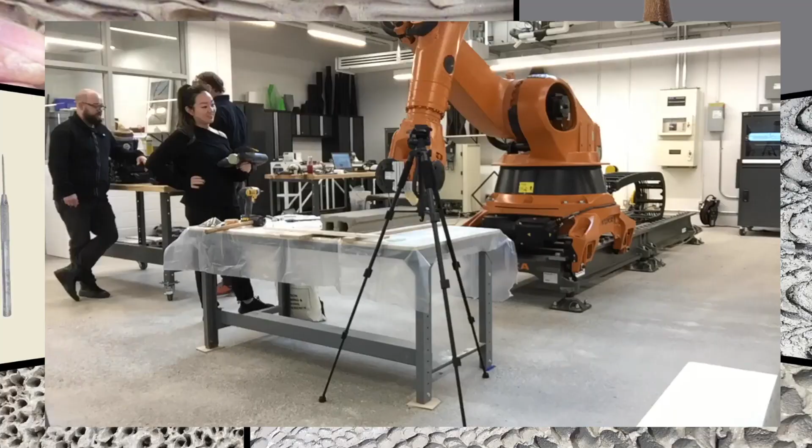Recording manual manipulations of clay allowed us to observe the behavior of the terracotta clay body and record impressions made by human touch. Because of the density of the clay and the need for speed in the factory setting, we realized that the robot was a critical partner when scaling up haptic processes to industrial fabrication.

Our next step was to transition towards recreating these haptic tactile experiences through the robotic arm.

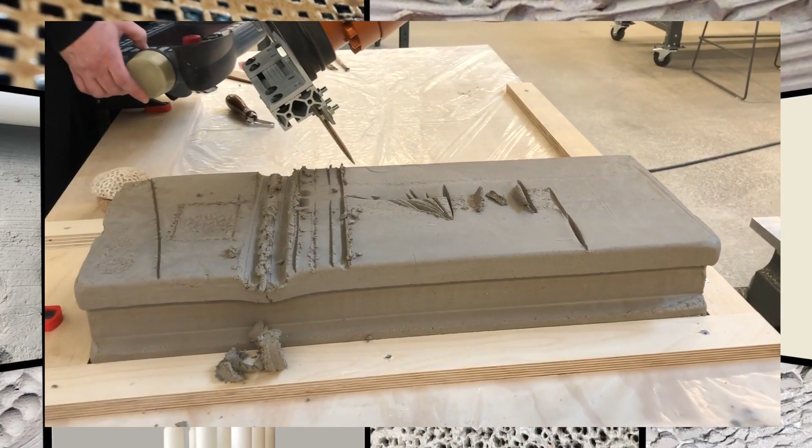Here we can see our very first experiments with the robotic tooling on Boston Valley Terra Cotta's standard terracotta extrusions. We simply attached a ceramic hand tool to the end of the robotic arm to mimic hand marks.

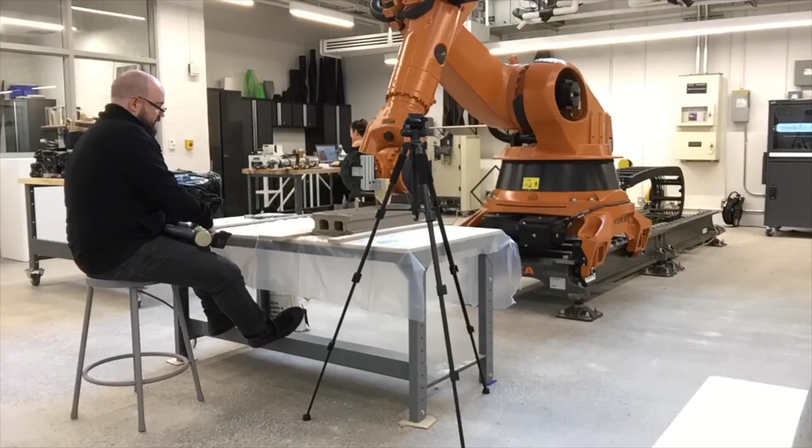It became immediately clear that direct translation between the hand and the robot would need skill development in terms of operation, material behavior, and produced effects. At this stage, the robot was operated using manual controls to better understand the forces the robot exerted on the clay. The clay used in Boston Valley Terra Cotta's manufactured products is extremely dense, so the robot provides strength to manipulate it, up to 150 kilograms of force.

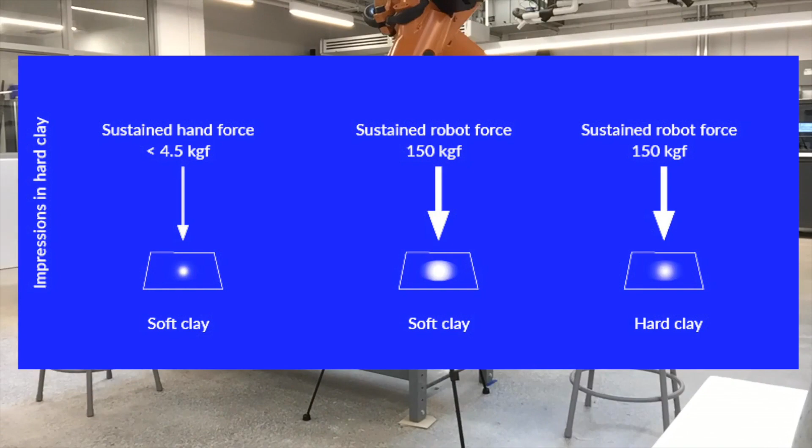However, because of its strength, it essentially treats the clay as a non-material. It carves through it without sensing how the clay is behaving, or even sensing that it is there at all. And so we needed to develop a process to program craft and materiality into the tooling that teaches the robot to account for the behavior of the clay.

We saw great potential in making use of the robotic arm in an industrial post-extrusion process, which would develop a new kind of digitally tooled haptic experience. We found that layering impressions in the clay created a richer surface and chance material behavior.

This is one of our first custom-made end effectors. The repetition and slight variation in terms of the tooling and the way we overlapped clay marks to create variations in material behavior, we're starting to come close to developing craft skill in the robot to mimic our initial hand manipulations.

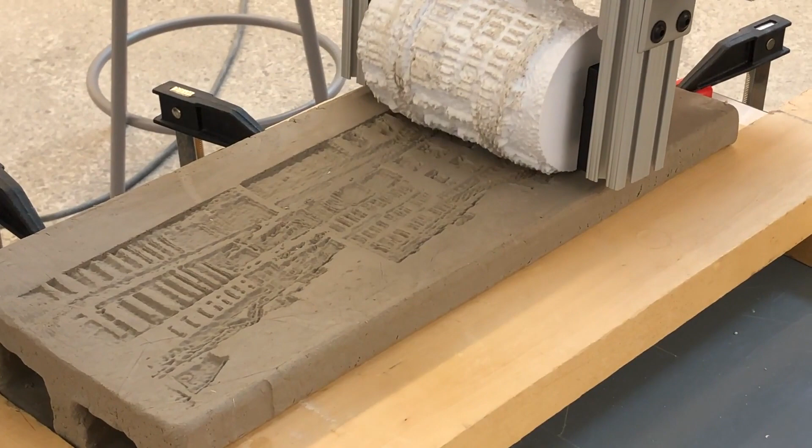We then simultaneously approached the project from another perspective, the optical distance. For this aspect, we worked with an image that could operate at an architectural or urban scale. Using an image from the archives of the Erie Canal Museum of Syracuse, we tested various ways the image could be made through impressions in the clay surface.

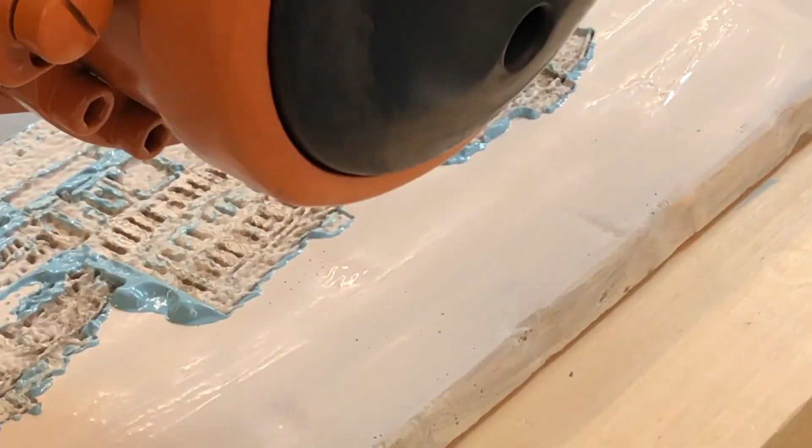Working with wet, unfired terracotta extrusions from the factory, we explored the use of common hand stamping tools, like these embossed 3D printed rollers. Multiple rollers were printed using variations of height field images wrapped on the roller surface.

An array of 3D printed end effectors were designed and fabricated at various scales, lengths, widths, and depths in order to test the legibility and textural qualities of the impressions.

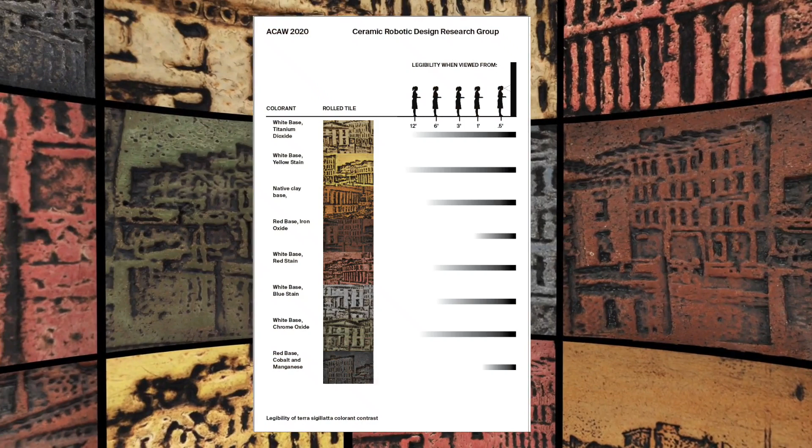One such exploration was the role of color in image legibility and haptic qualities. Applying terra sigillata allowed us to create layers of color, providing contrast and therefore legibility at various distances.

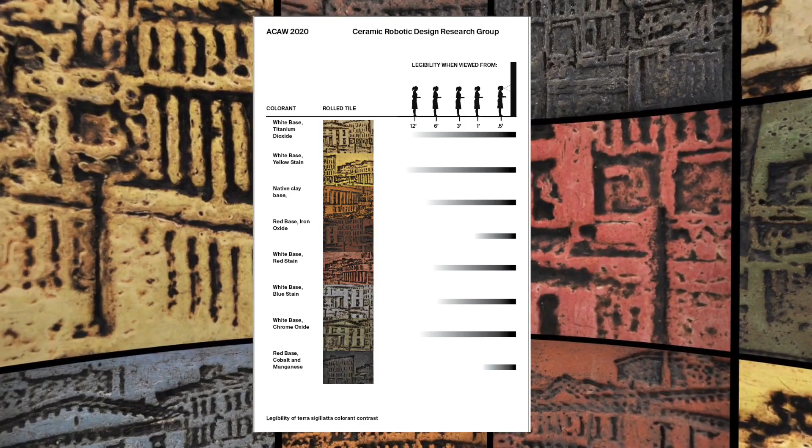We were also interested in the indexical relationship between clay, color, and the physicality of sites of extraction. We explored using clay from the banks that feed the Erie Canal to produce the sigillata, so the colors would reveal the materiality of the site itself in both a symbolic and embodied way.

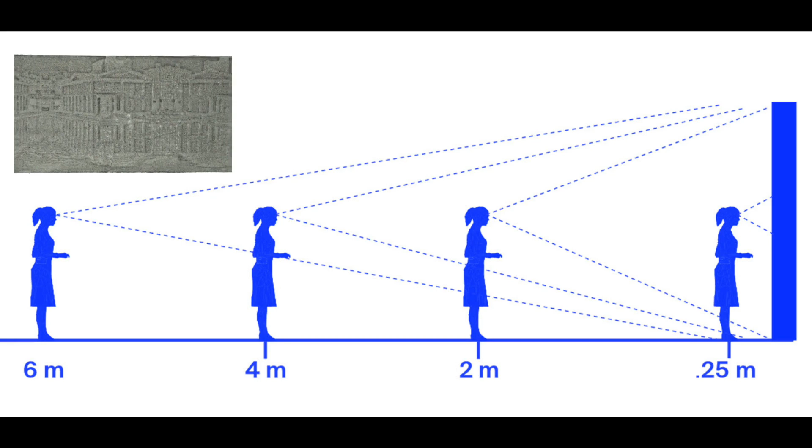We then explored a variety of 3D printed rollers, differing in scale and geometry. Throughout the experimentation, we sought to create and test legibility of the image at varying distances. We found a depth limitation in this process.

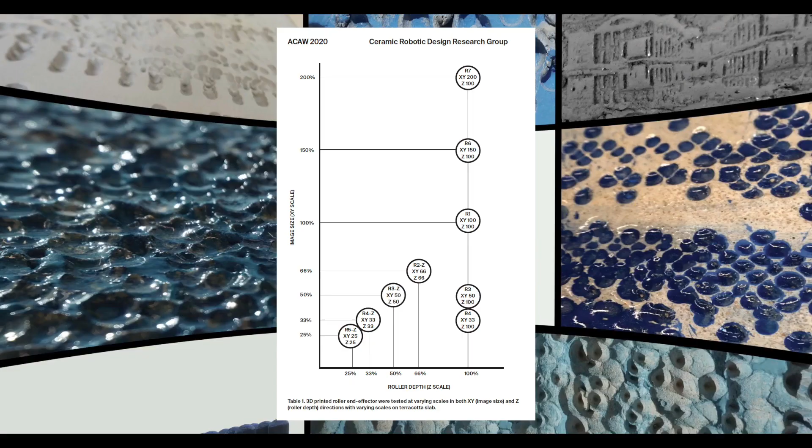To be legible from afar, the roller needs to be scaled proportionally in depth. This is not always possible within the thin surface of the extrusion panel, as we can see in this chart.

We also explored different types of roller geometries, including those that would roll in a non-linear manner to produce surface tessellation patterns simply through rolling. This included an oloid roller, tricylinder rollers, and wobbly rollers, which are cylindrical rollers clipped at various angles to roll along a wave-like line. Ultimately, we found we were limited by the roller.

As the image gets larger, it was difficult to embed the density of details required to produce tactile qualities at a haptic distance. What became evident is that the embossed roller method images seemed to only work well when scaled at a single terracotta panel.

When we tried to scale up the roller to produce an image across multiple panels, not only was this highly uneconomical in terms of roller material required, but also insufficient in terms of the legibility from afar and the haptic qualities from up close.

Here we encountered a common problem of digital fabrication and design. Digital images can be infinitely detailed, but those nuances don't translate to clay in the same way.

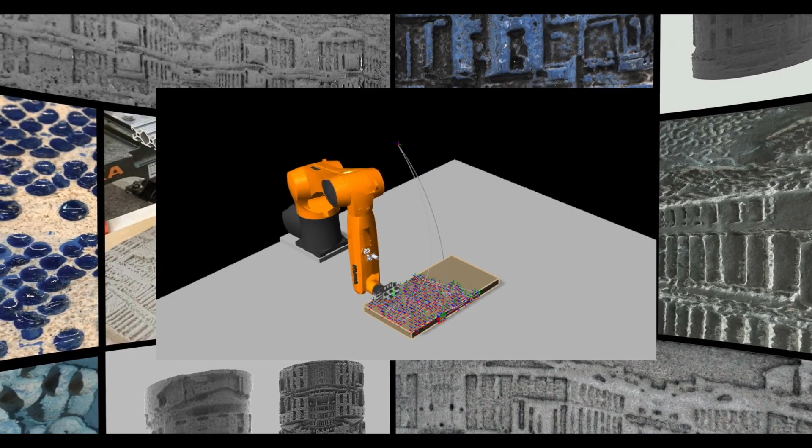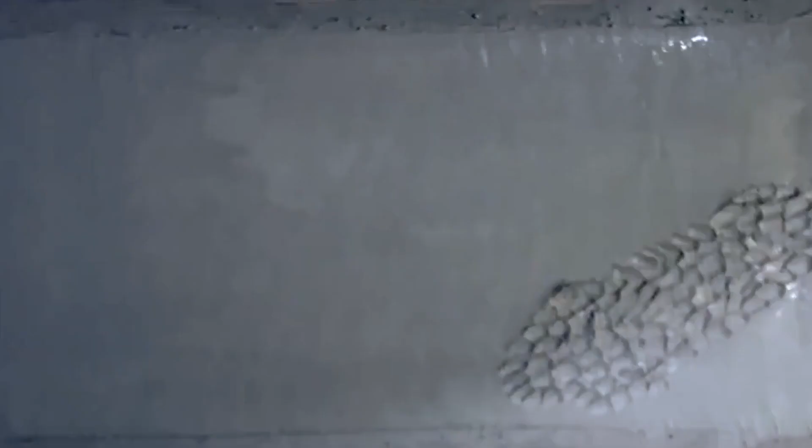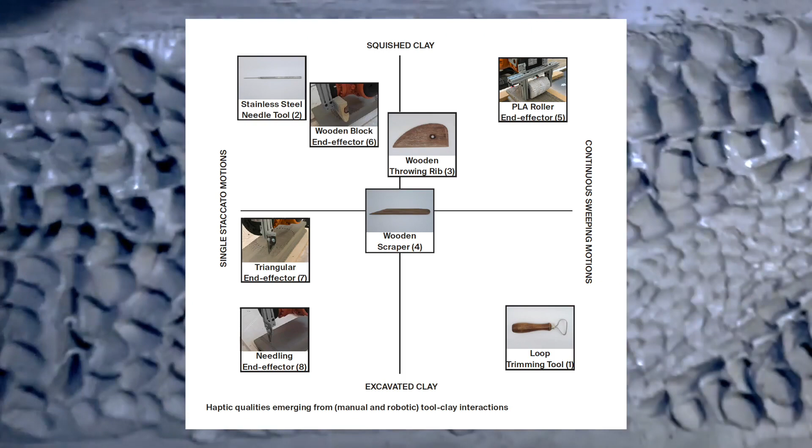Clay doesn't always want to be digitally precise, and digital 3D modeling is unable to precisely simulate the behavior of clay. Instead, all materials are treated as quasi-non-materials, with no character and no behavior. Yet clay deforms—its moisture shapes how it forms ridges and builds up, how it sticks to the tool or peels off. This unpredictability was precisely our interest in the digital process.

So we returned to some of our early tooling methods, learning from the pressure required to affect the surface topography. We fabricated a series of tools as extensions of the robotic arm. We found the more compelling textures to be those that suggested pointillist paintings and bas-relief sculptures, textures that are familiar and haptic. This type of craft sensibility allows us to move beyond the novelty of robotic technology towards an artistic end, one of our team's primary goals.

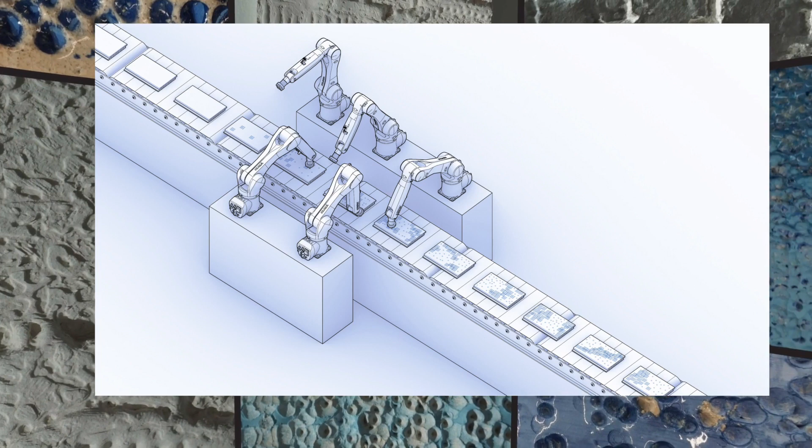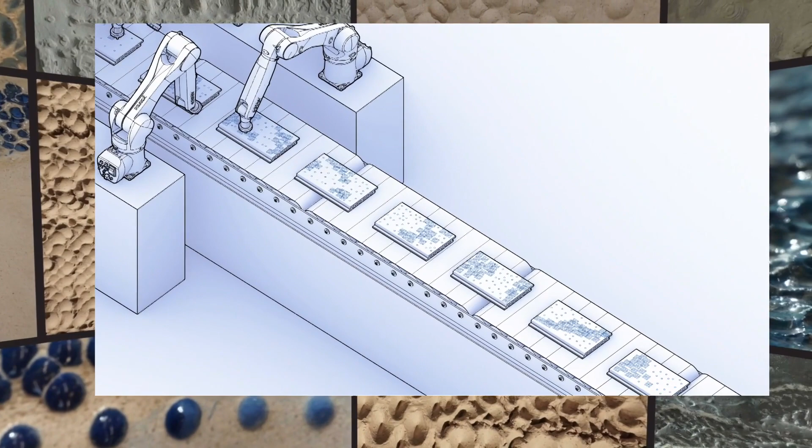At the same time, we saw the potential for this method to produce a type of digital manufacturing economy. Any image or textual pattern could be programmed at the same cost using the same tools. With the robotic arm, the economy of production is no longer that of matrices—no longer finding economy by making numerous identical copies from molds or stamps. Instead, the logic of automation uses economy of movement, where each movement per second costs the same as any other movement. With the capability of moving at a pace of 2.3 meters per second, programming custom images for robotic stippling had scalability potential.

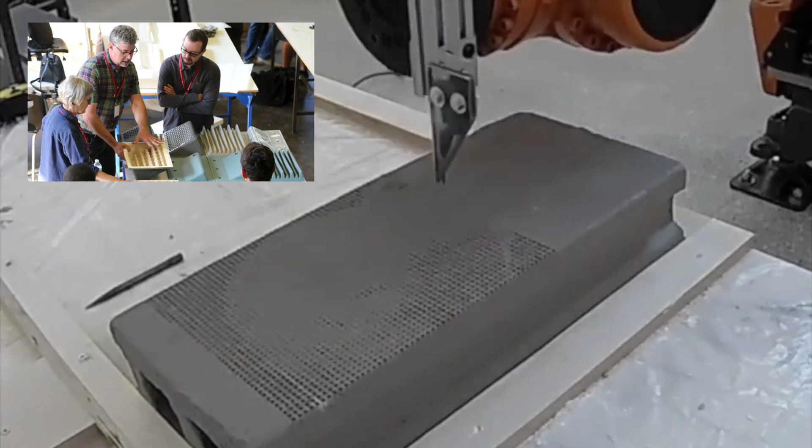In our early attempts at using this method to create an image, the results fell flat, literally. Seen here is a panel tooling of someone you might all know, at ACADIA 2017. This early test didn't leave room for a feedback loop between the digital design process and the corresponding material behavior. Here, the terracotta panel was still being treated like a non-material.

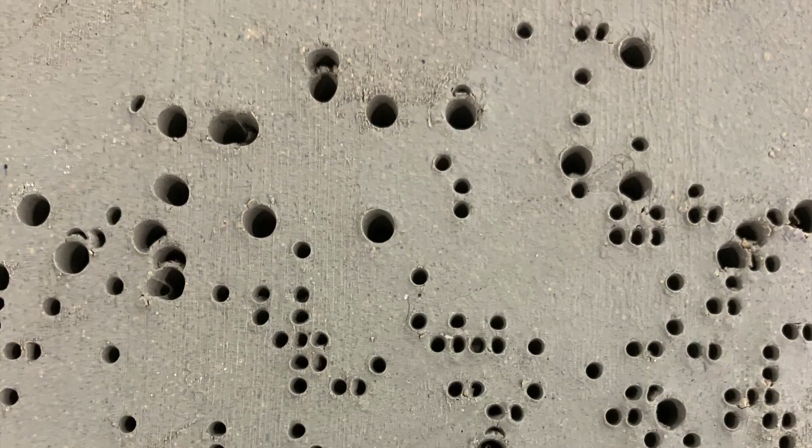Tooling was based on images produced in a grasshopper script, which assigned various diameters of circles based on light and shadow. This was directly applied as a tool depth to the clay surface using a tapered pick to make impressions. The resulting panel was not compelling materially, nor were the images even legible.

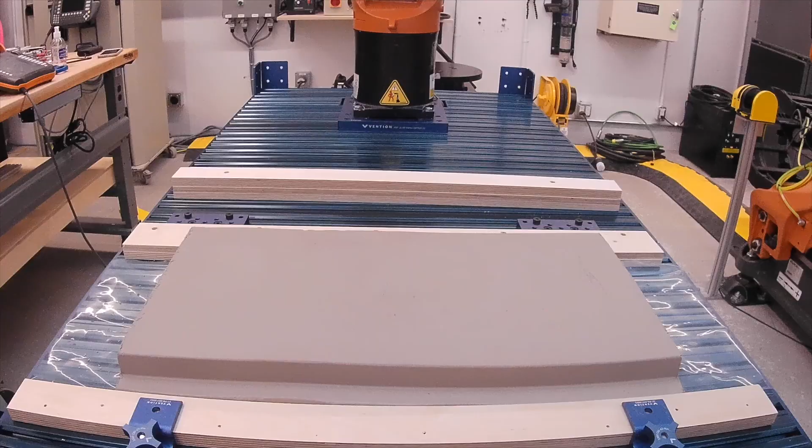So we realized that we needed to stop trying to predict or control the outcome of the digitally tooled clay. Instead, like we did by hand, we started by simply making marks, this time through various randomized, computationally scripted points. Just as an artist might repeatedly make the same action to see what might shake out, we also treated the digital process in the same way, developing a feedback loop between the haptic qualities produced rather than trying to make the clay conform to a premeditated image.

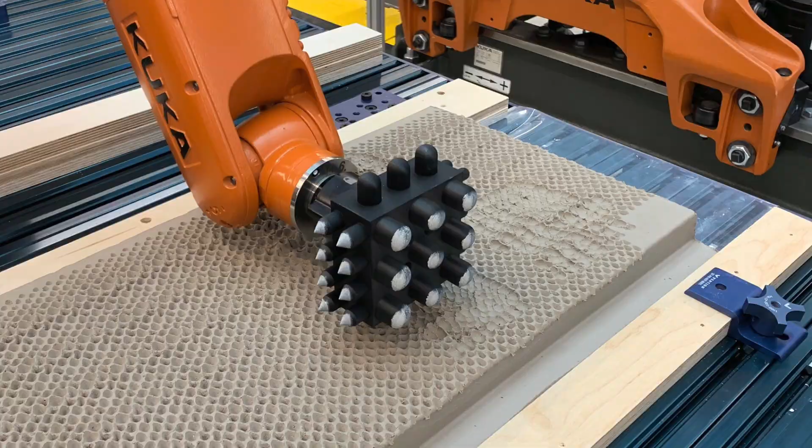We started from a series of densely packed gridded points and moved towards random seed-generated points, varying density, spacing, depths, and radii of marks. We also developed a 5-sided tool making use of the 6 axes of movement of the robotic arm for continuous tooling of varying marks. In this way, with our robot collaborator, we began building skills over time with training, in the form of altering programming and tools, to exploit the central qualities of the resulting material effects and produce a feedback loop.

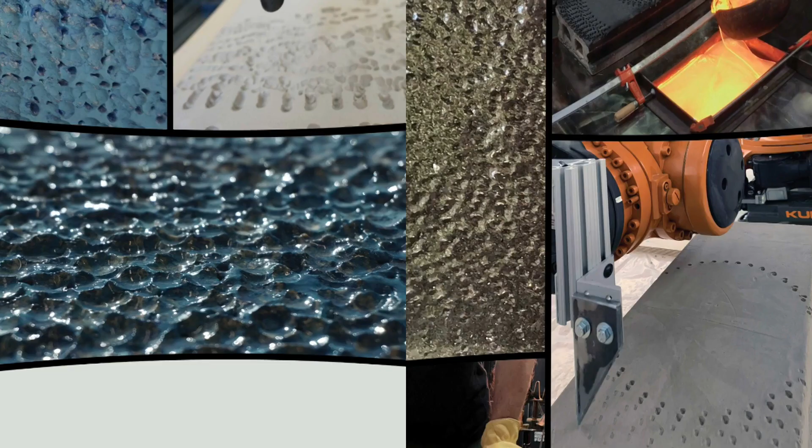Dense and overlapping marks, the scale of fingerprints, on slip-colored clay created literal and phenomenological depth to the surface. We evaluated these surfaces based on surface qualities and textures, matte and gloss finishes, their potential to catch light, and how they might reflect their surrounding environment.

In this regard, we were also interested in how these digital haptic terracotta surfaces might interact with other reflective materials, namely glass. Reconsidering the tooled terracotta extrusion as a mold, a series of experiments were conducted at the Corning Museum of Glass to explore how our digitally tooled surfaces might inform the behavior of molten glass.

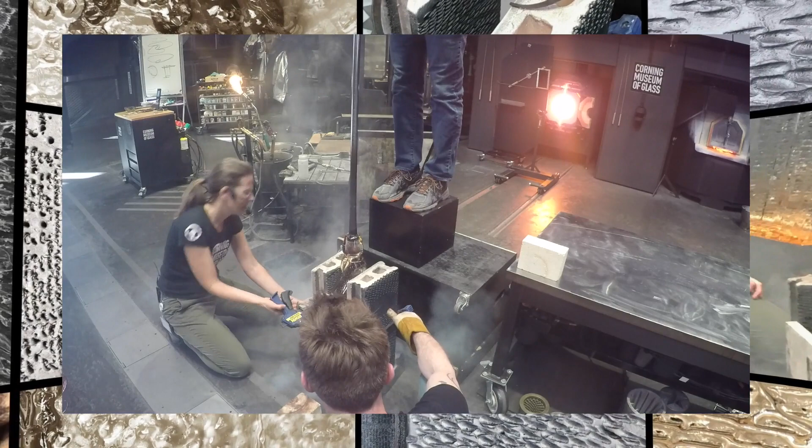First, a cavity mold was created for a blown glass vessel. The tooled faces were set up to form a cavity and clamped tight, and pre-coated with graphite release agent. A calibration tool was used to pre-size and pre-shape a molten glass bubble, which was then lowered into the cavity and blown using a blowpipe. The vessel was rolled, centered, and shaped using the flame, and the blowhole was cut off in cold working. Experiments were made with clear and colored glass to test optical effects of the pattern.

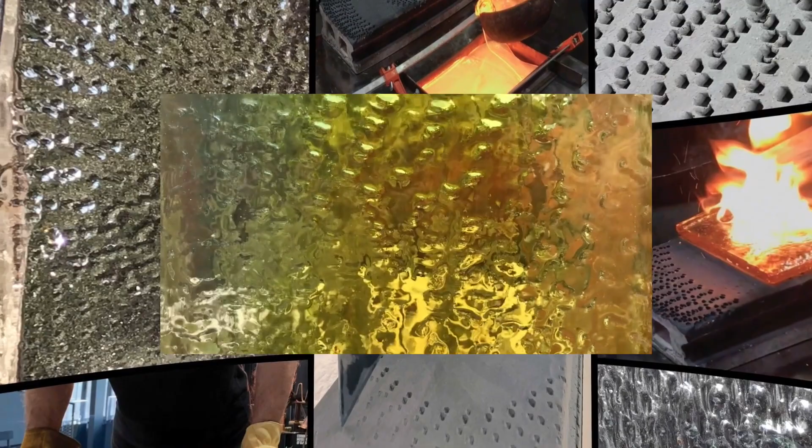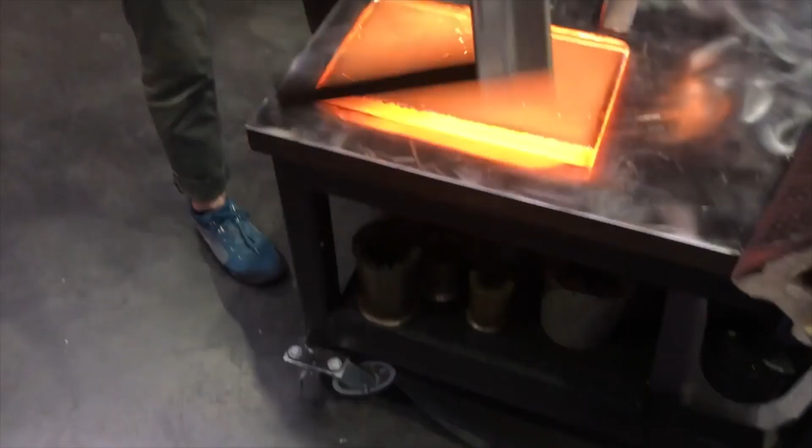Second, a press mold for cast glass was explored. A thick glass slab was cast into a steel frame. The tooled terracotta surface was pressed onto the glass slab for several seconds, then released, generating a transferred pattern.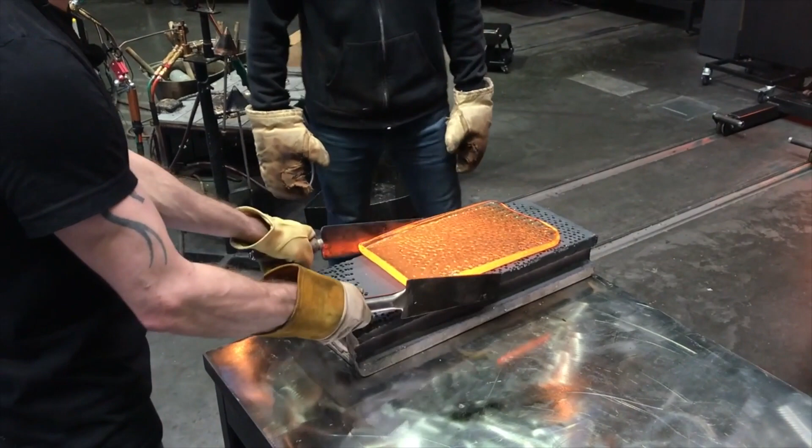Finally, a surface mold for set and press glass was tested. This thick glass slab was flipped onto the mold, allowed to set for a couple of seconds, and then pressed into the clay to pick up the tooling. As with our terracotta experiments, we hope to develop a feedback loop between the digital tooling of the terracotta panels, here used as molds, and the material behavior of glass.

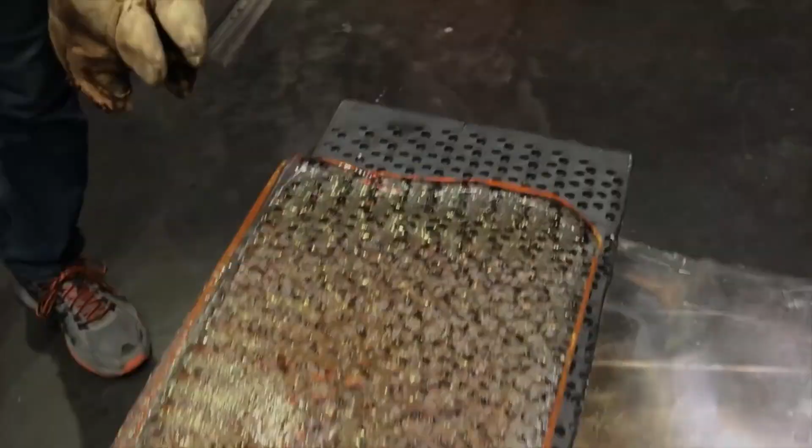Our next step was to apply these sensibilities about digital materiality to a large-scale image, with the goal of producing a surface that operates at both optical and haptic scales. Sampling the qualities of the most successful haptic surface tests, we assigned them to different regions within the image.

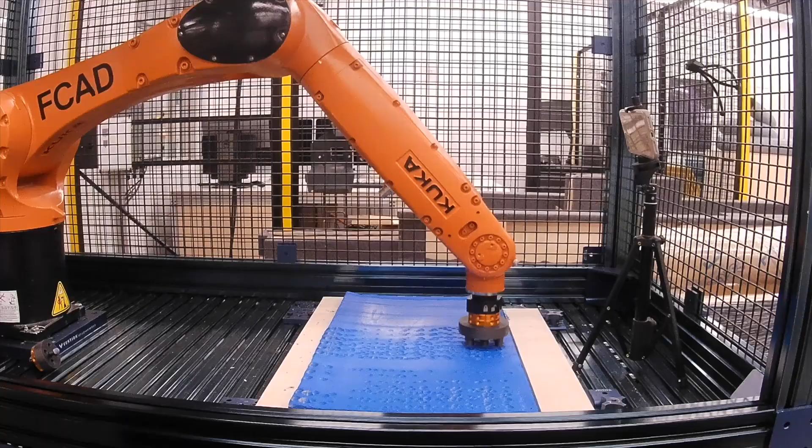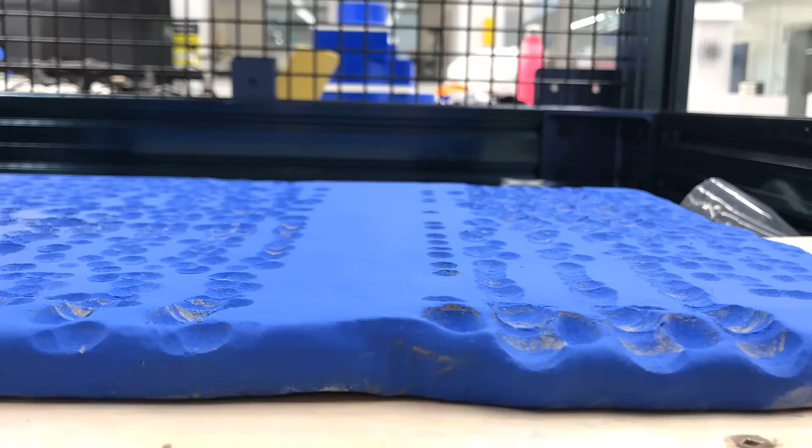In the final stages, we undertook a series of performance optimizations. Because of the robot's 6 axes of motion, you can have up to 5 tools on one end-of-arm tool and seamless changing between tools. We also calibrated the relationships amongst the impressions made by the larger tools in combination with detailing achieved by smaller tools, to reduce tooling time and accelerate the process.

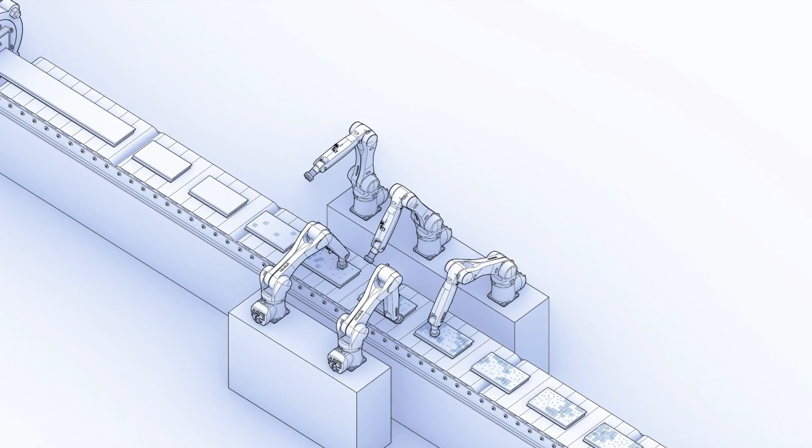Our KUKA robotic arm can move about 2.3 meters per second. Thus, our post-extrusion tooling procedure can easily keep up with the speed of industrial production, especially when executed in full automation in a closed cell system. Multiple robots can also work side by side to produce an endless variety of images, patterns, and textures.

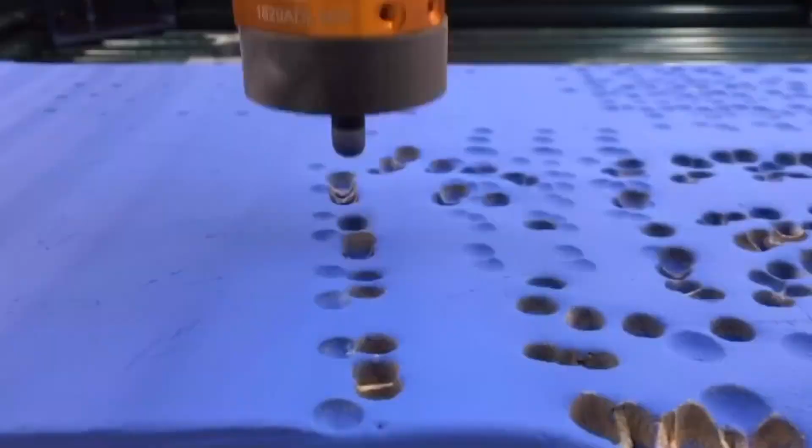Through careful design of the end effectors and its operations, our team was able to create highly dense textures at high speeds. Ultimately, we aim to produce an image that performs beyond the surface.

This piece aims to be experienced not as a static image, but in motion relative to its viewers. As we move towards the image, the figure begins to fade as its tactile qualities become more vivid.

In the spirit of this virtual conference, we hope to bring this experience to you through our VR exhibition at www.hapteklab.com, where we invite you to explore the one-to-one scale mockup from a variety of distances.

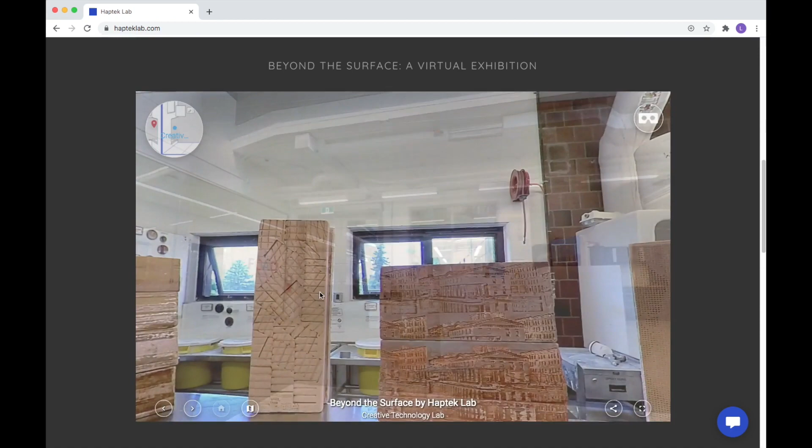We also hope you will join us virtually in both the Creative Technology Labs at FCAD in Toronto at Ryerson University, as well as the Ceramic Studios at Syracuse University in Syracuse, New York, to see more of the processes, experimental failures, and successes of this project.

If you are joining from home and have access to a VR headset, we invite you to click the icon on the top right-hand corner for a fully immersive VR experience. From a desktop or mobile browser, simply use the hotspots or the VR plan to navigate through the various virtual rooms.

Ultimately, our process sets up the potential to integrate a new kind of digital craft into Boston Valley Terra Cotta's manufacturing pipeline, operating at speed in concert with the factory's production line and at sub-millimeter accuracy and repeatability. The robot becomes a critical partner in the manufacturing setting, offering the ability to create bespoke designs through an automated process, calibrated against digital craft and haptic feedback.

This also offers the potential to be integrated with industrial manufacturing processes to make otherwise highly laborious detailing more widely accessible. Through programming and customized tooling, bespoke panels can easily be created without significant changes to the factory. We hope this process can unlock new possibilities for the craft of making within industrial ceramics production.

In the next phase of this project, Haptek Lab aims to further develop this digital materiality at larger scales, exploring how designs translate across scales spatially, as well as from the tactile to the scenographic.